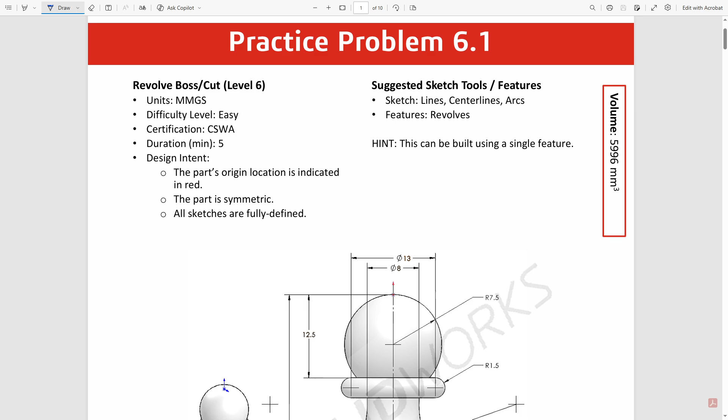Hi, my name is David, and I'm going to walk you through how I solved the CSWA practice problem 6.1.

So here we're going to make this pawn, and the strategy I'm going to use is to use the front plane, although it doesn't really matter too much, front or right plane. And then I'm going to draw this profile right here, and a center line going from top to bottom. Actually, the center line first and then draw the profile along the side here. And then at the end just revolve it about the center line, revolve this profile about the center line. It can automatically close off the region, so we'll see that happening.

All right, let me go ahead and erase this because we might want to see some of the details there. Let's head over to SolidWorks.

So first off, I'm going to draw the center line. Going to get into the front plane and then draw the center line. It looks like from top to bottom it's 38. So there we go.

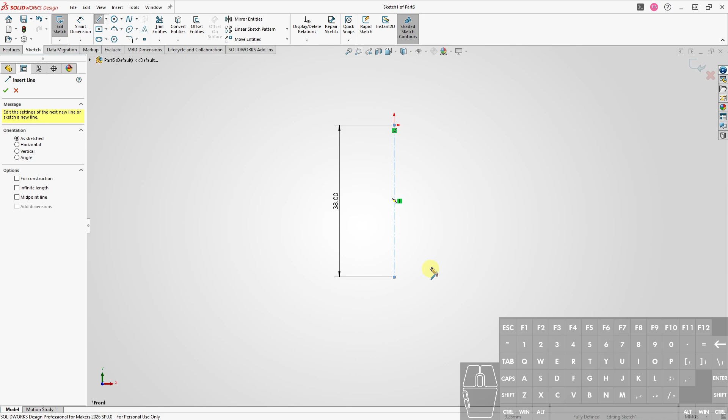And then start drawing the profile. So from here to here, actually I think I'm going to smart dimension some of these things a little bit later, so I'll just draw something out there. I will smart dimension the arcs right away, so I don't have to worry about those later.

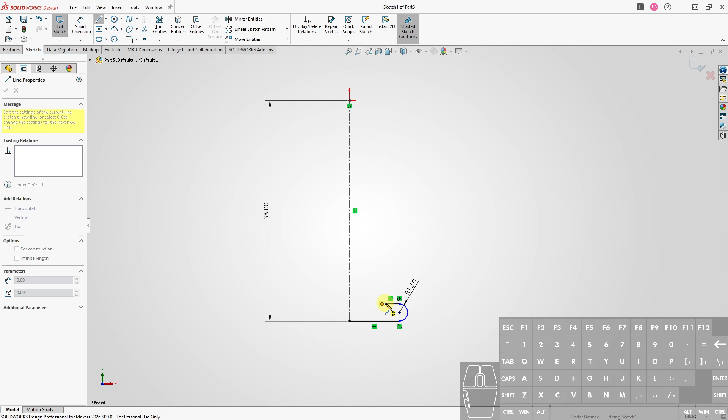And I'll go out and in to switch over to the arc mode. Unfortunately, it makes it tangent. I'm not sure how to deal with that, aside from going back in and deleting those tangencies. But for now, we'll just leave it in there. And the radius here is 6. So we'll go out some and then make another arc in the other direction. There we go.

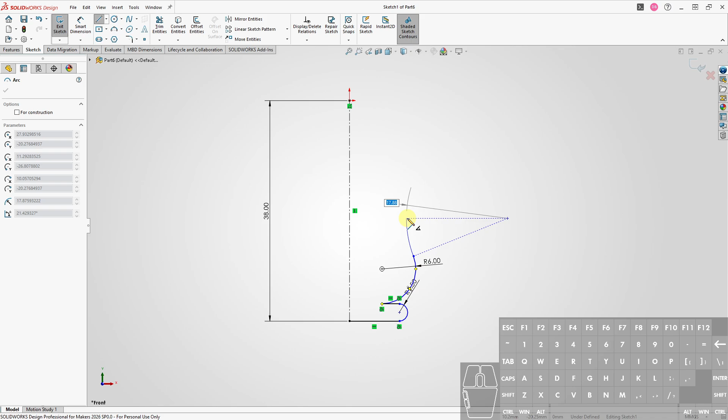15 for this one. And it goes up a little bit. Then we go to the right. Get another one of these little bumps. There we go, and in a little bit.

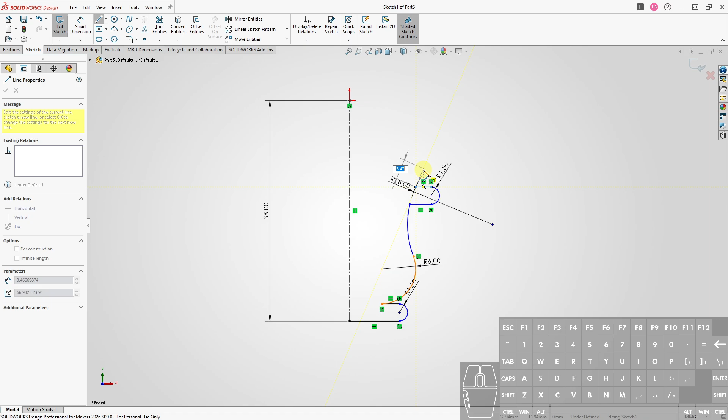We got to make sure we don't lock into anything. So I'm trying not to, although I think these blue lines mean it's not necessarily going to be locked. So I'll just click somewhere. If it is locked, we'll have to unlock it, remove the relation.

All right, so we want an arc, but we don't want it coming out that way. We want it going this way. And we have 7.5 for this one. Yeah, it looks like this is the one that goes all the way up to the top. We're going to have to lock that in later. Okay, my pawn is falling over here.

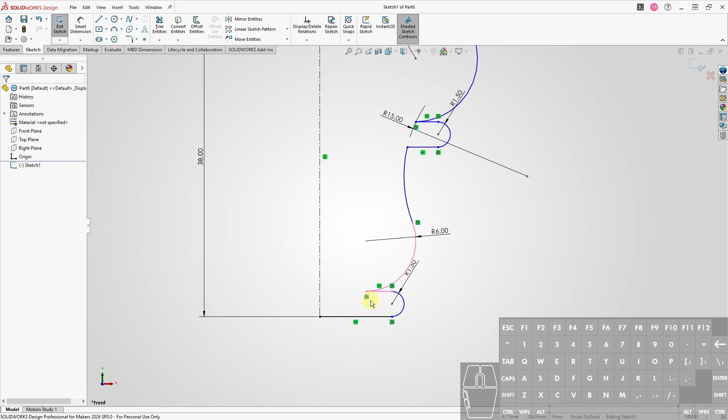All right, so let's get rid of some of these relations that we didn't want, like this one right here, this tangency. We don't want that to be tangent. Let's see, up here, there's also another one. We don't want that one to be tangent, so get rid of those relations.

Let's go ahead and make this point coincident with this point. Okay, good. I'll move this back over to here, make it look a little bit nicer. Okay, let's see if we have any more unwanted relations here. Looking pretty good. Tangent, tangent. All right, good.

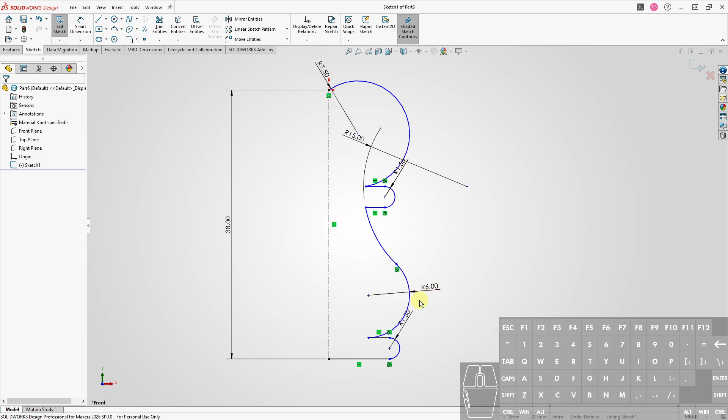One time I had an unwanted relation and I had to fix it and I couldn't figure out what was going on, so just maybe scan through if you draw a profile like this and see if there are any unwanted relations. All right, so let's start smart dimensioning.

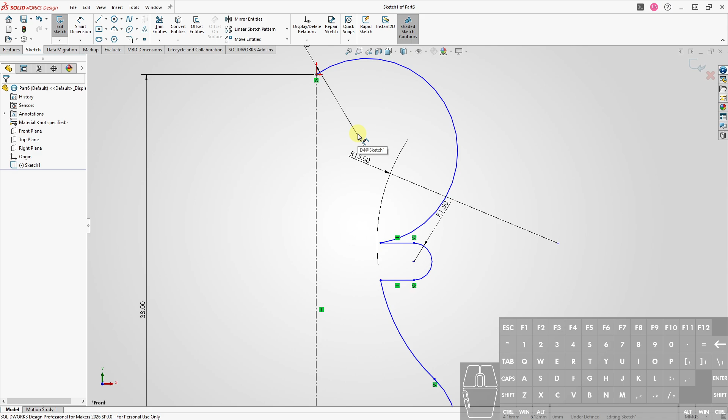We have, it's nice to have this center line here because we can, one thing I want to do too is make this arc so that on the top it's perpendicular, and the way to do that is to select this point right here and make it coincident to this center line. There we go. Okay, perfect. So when that happens, when this center of the arc is on the center line, then when you're at the top right here, the arc is going to be perpendicular to this center line.

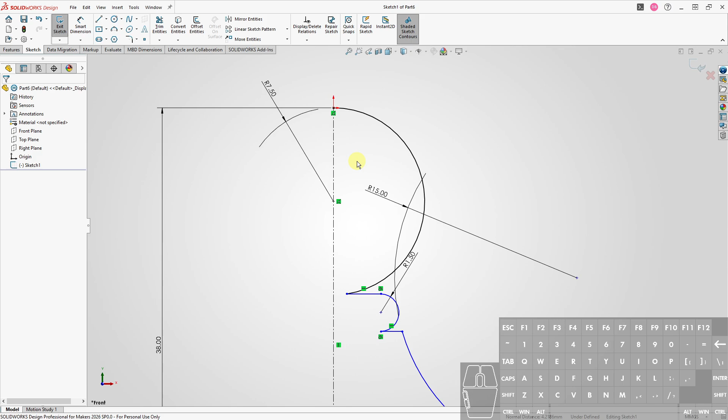All right, good. So let me move some of these smart dimensions so we can see better. All right, there we go.

And this one too. There we go. How many times am I going to say there we go?

Okay, so let's go ahead and start smart dimensioning some of these pieces. This point right here is a distance of 4 from the center line, or if you go across the center line to the other side, the mirror image, that distance is 8. The nice thing is you can do that when you have a center line. I believe that was this point right here.

So I'm going to click here, and when I'm on this side of the center line, it goes all the way across as if you had a mirror image. But if I'm on this side, it would just go to the center line. So I want to go all the way across, and that distance is 8.

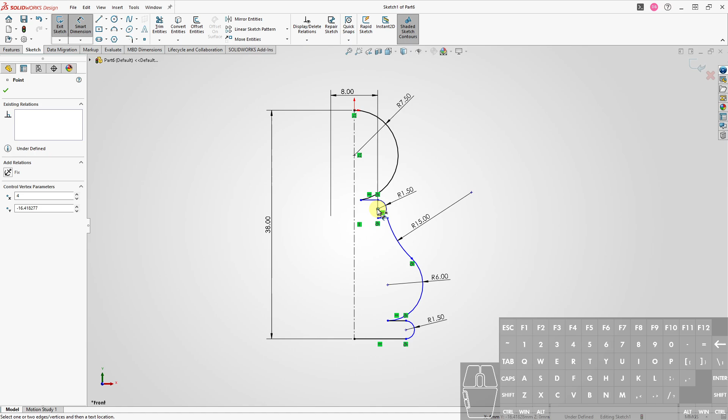I want to do something similar for this point right here. Go all the way across. Oops, I think I got the wrong one. Oh, did I get the wrong point? Okay, that's the one that should be 13.

And then this one here, oops, sorry, this one down here is the one that should be 8. All right, sound good? That one's okay?

Okay, at this point we should be able to move, yeah, because we don't have that tangency relation anymore. Alrighty.

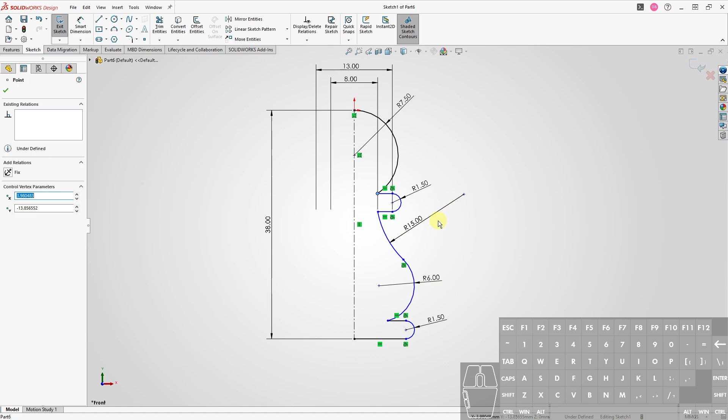So let's go ahead, and we got those two. We'll go ahead and make this distance from here up to the top. That should be 12.5.

All right, and then let's work on some of these distances down here. Looks like from here to the center line, mirrored across, should be 13. And then from this center point to the center line, mirrored across, should be 18.

Okay, and then there's one more thing, which is this little arc right here. It looks like that arc, the farthest right point of that arc, should also line up here with the center of this arc. And also this farthest right point can be viewed as a distance of 9 away from the center line, or 18 to the other mirrored version of that arc.

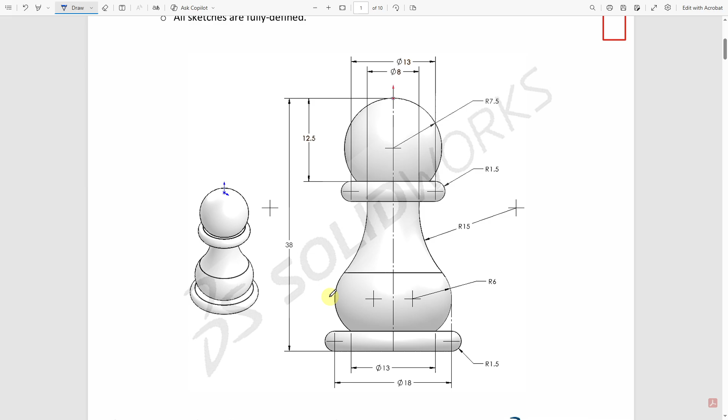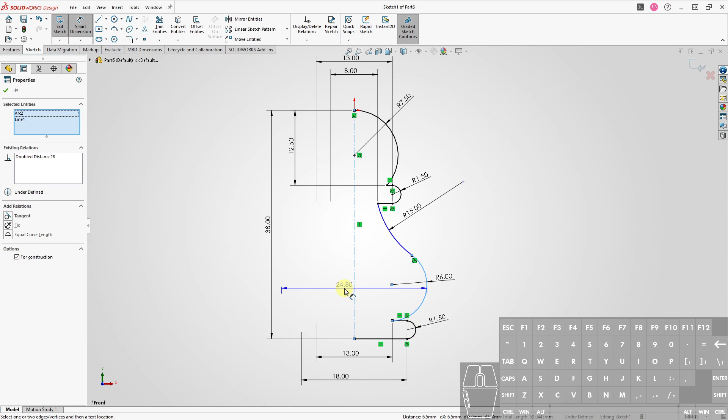So there's a nice way of handling this. What we can do is smart dimension from this line, and if you highlight the arc but hold down shift before you highlight it, and then click, we can get that distance from the center line to the arc, or if we go over to the other side of the center line, we can get the mirrored distance. That should be 18.

Okay, and you can see how this will line up perfectly with the center of this arc. And voila, we're fully defined.

There's a little note here, which is I kept trying to make this arc perpendicular to this line, but it turns out you don't even need that. It'll be fully defined anyway without that. I didn't stop to check if they actually are perpendicular, but it's not something you need for this one.

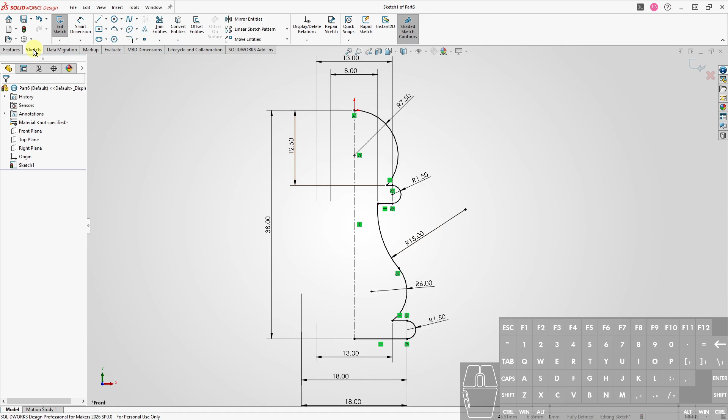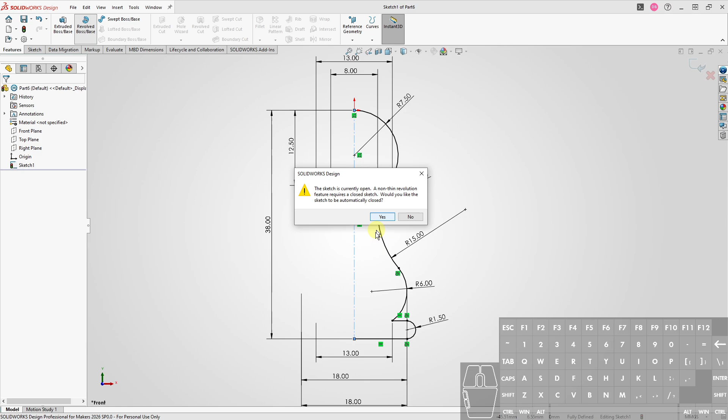Okay, so now what we can do is revolve. It says the sketch is currently open because we haven't technically closed it off. I mean, there's a center line closing it off, but that doesn't really count. So it says a non-thin revolution feature requires a closed sketch. Would you like the sketch to be automatically closed? This should automatically close it off from the 2 points at the end of this profile. And that's what we want. So we want that to be our region that we're rotating around.

Okay, great, so it's making this pawn, and we hit enter, and looking good. So the mass, it says, is—let's see, we're looking for mass, or what are we looking for here? Volume: 5996 cubic millimeters, and we got 5996.2. So we got it.